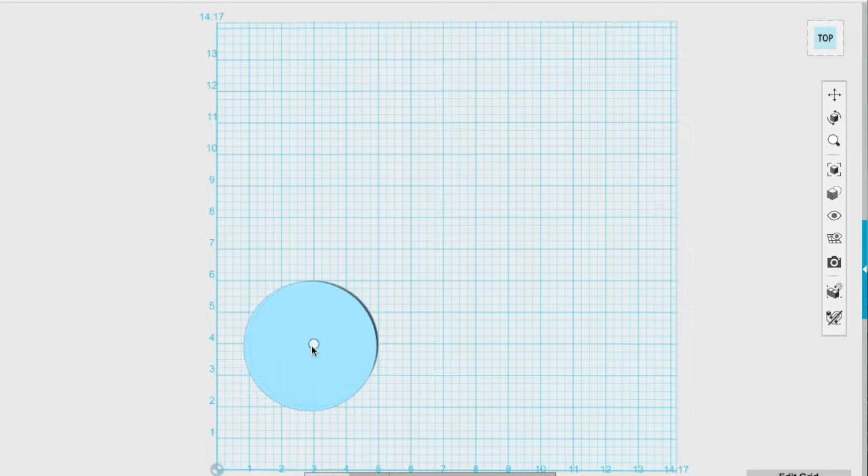This week I am 3D modeling a 2-liter bottle. I chose this project because I thought it would be fairly simple, just combining some primitive objects such as domes and cylinders to create an end product. I also wanted to take the opportunity to learn a few new techniques, such as patterning, as well as external and internal threads. The external threads would be going up the neck of the bottle, and the internal threads would be for the inside of the cap.

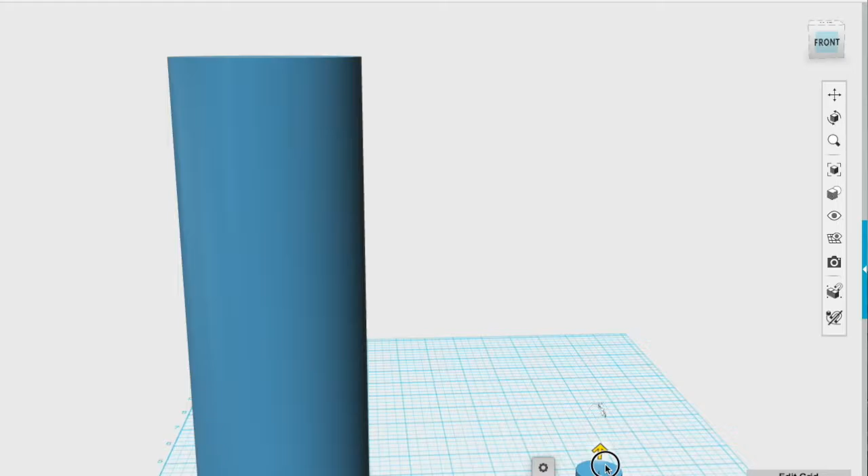This process took a lot longer than I expected, which is why this video is so late coming out. The main reason is because, as with most simple things in life, once you start studying them, especially if you try to replicate them, it turns out to be much more complex than you first realized. The same goes for a 2-liter bottle, especially when replicating it. There's a lot of nuances - lots of flares, concave shapes and convex shapes, as well as it being hollow.

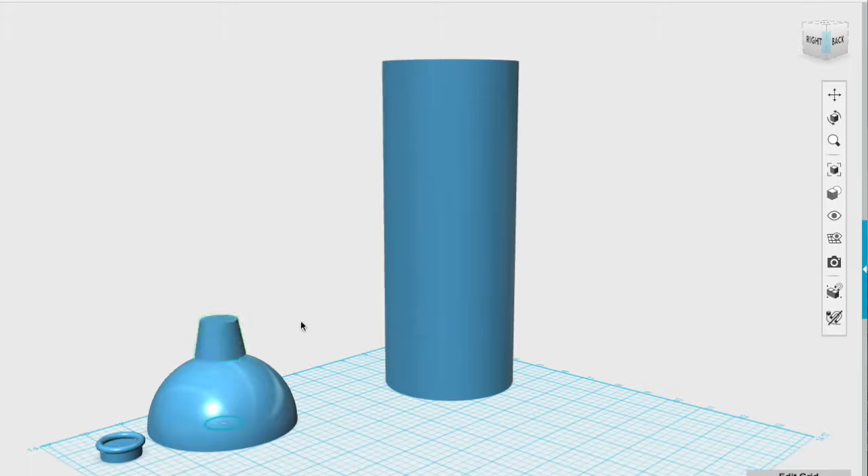Alright, let me catch you up to speed. What I've done is create a flared cylinder - I took a circle, extruded it, and beveled the edges. This represents the flare in the neck of the bottle just under the threaded portion. I snapped the dome to that cylinder to make sure it centers itself. If you snap the cylinder to the dome instead, it will connect wherever - it doesn't snap immediately to the center. So snap the dome to the cylinder and it will align itself properly.

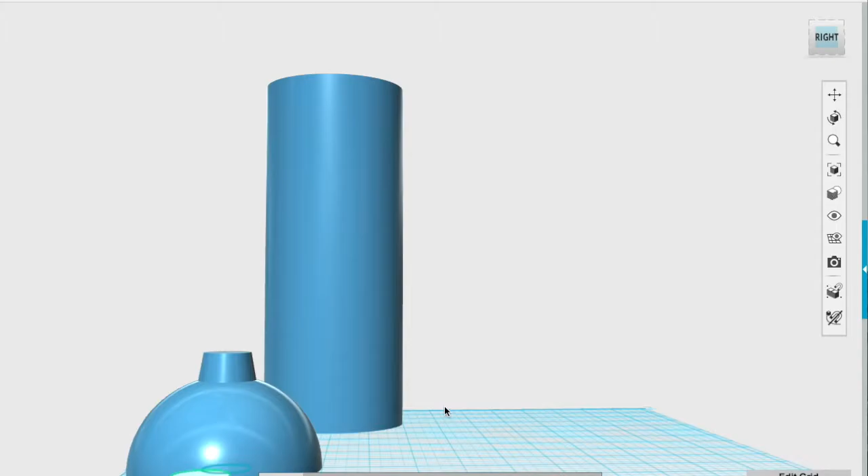I also took a shorter cylinder and stuck a torus, or ring, onto that. That ring represents the lip on a 2-liter bottle that the cap rests against once it's screwed all the way down - it helps prevent leaks. So I made sure my 2-liter bottle had one of those rings on it.

Unfortunately, I did not have a 2-liter bottle on hand to use as reference. I really should have - as an artist, if you're trying to replicate something, you always want reference. Unfortunately, we finished the cream soda I was going to use, and the bottle got thrown out before I could make this video, so I'm doing this by memory.

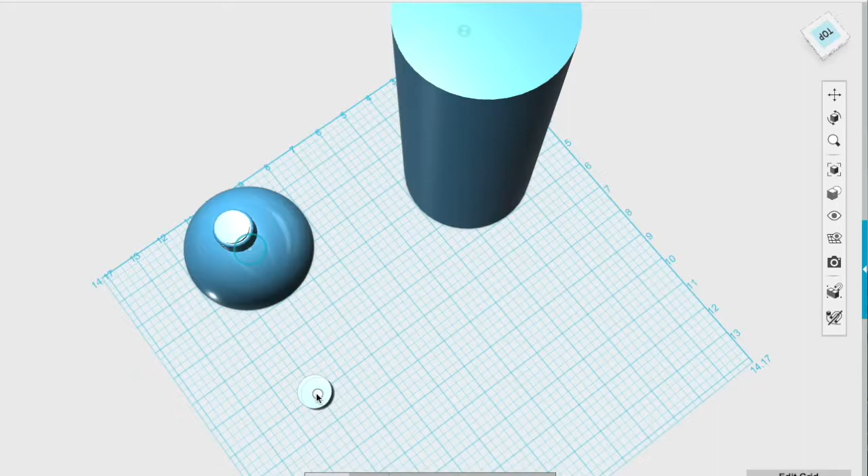Okay, the cylinder I just added is going to be the threaded portion of the bottleneck, and I'm adjusting the sizes and what have you to my liking.

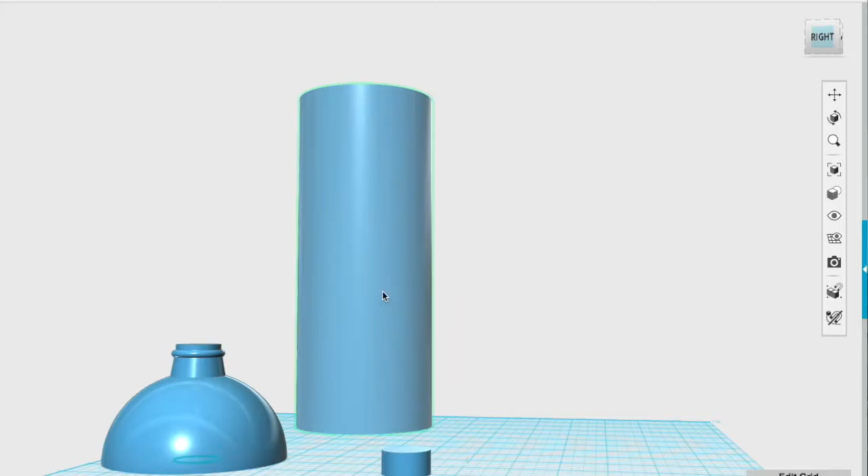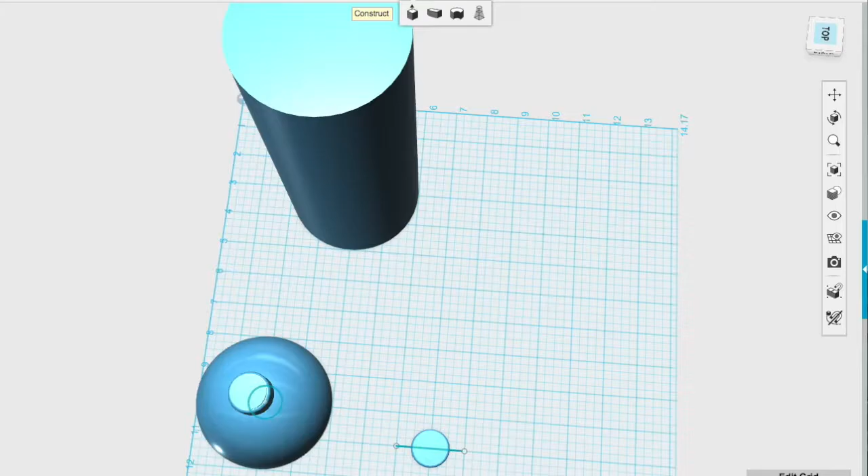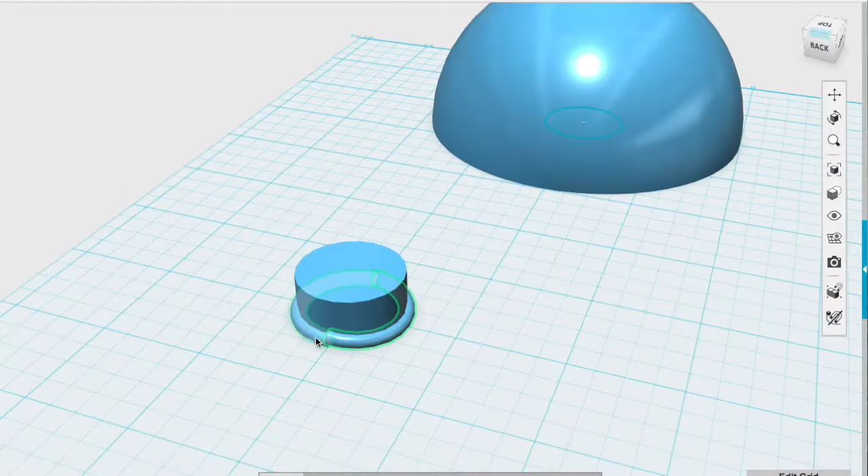Here I am adding a torus. The purpose of this torus will be in the creation of the threads. What you do is split the torus into two equal-sized ring segments - basically cut a ring right in half. Then you tilt each half in different directions. For example, if you tilt the ring on the left -6 degrees, you want to tilt the ring on the right +6 degrees, so it's opposite to each other.

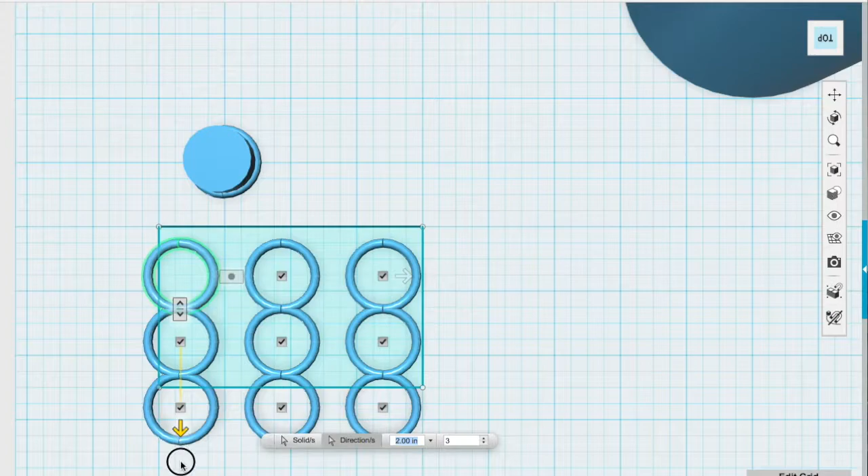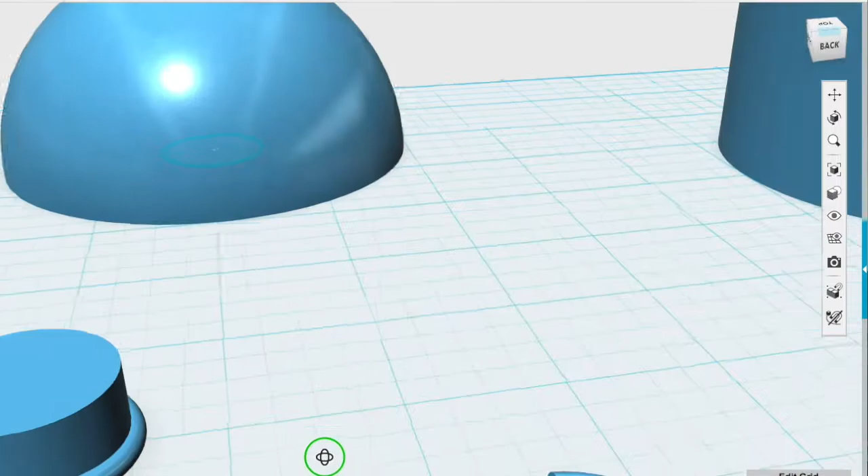Unfortunately, I tilted the wrong axis the first few times, and when I snapped these ring segments back together, they actually joined completely and formed a solid ring instead of the spiraling thread I was trying to create. It took me a while to figure out why it wasn't working. Once again, I was tilting the wrong axis - I was tilting forward and back, not side to side. If you tilt one thing forward 6 degrees and the other back -6 degrees, it's basically on the same angle, and when you snap them together it forms a solid ring, which is not what I wanted. I wanted threads - a nice spiral.

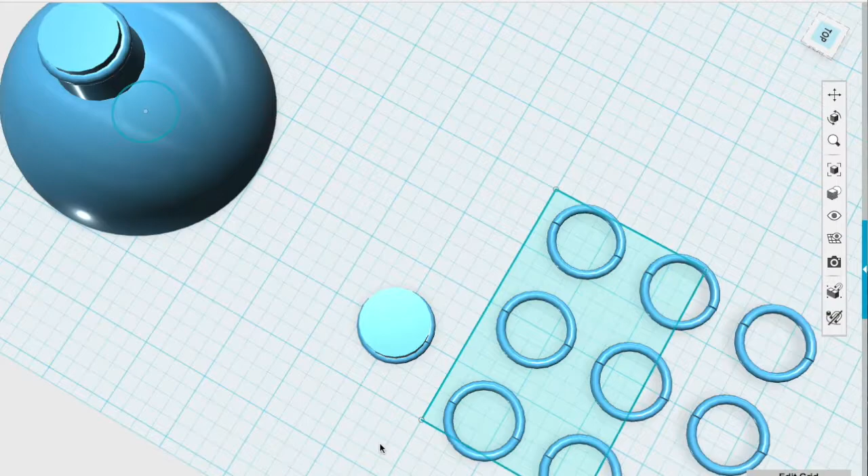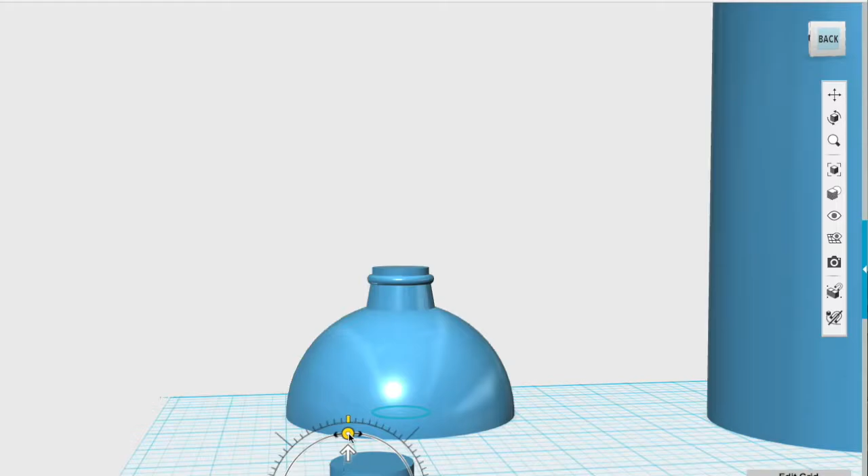In this portion, I'm also learning how to use the patterning tool. To do this, I copied and pasted the ring segments after tilting them, then took a rectangle sketch and put that on the work surface. You need a sketch to work off of when trying to create a pattern, so that you can pick which direction you want your pattern to go in.

So you go up to the pattern tool, select the object you want to replicate, then select the side of your sketch - in this case a rectangle - indicating the direction you want your pattern to move in. Then you just drag your mouse over and it multiplies your object as many times as you like in the direction you move your mouse. That's how you use the pattern tool.

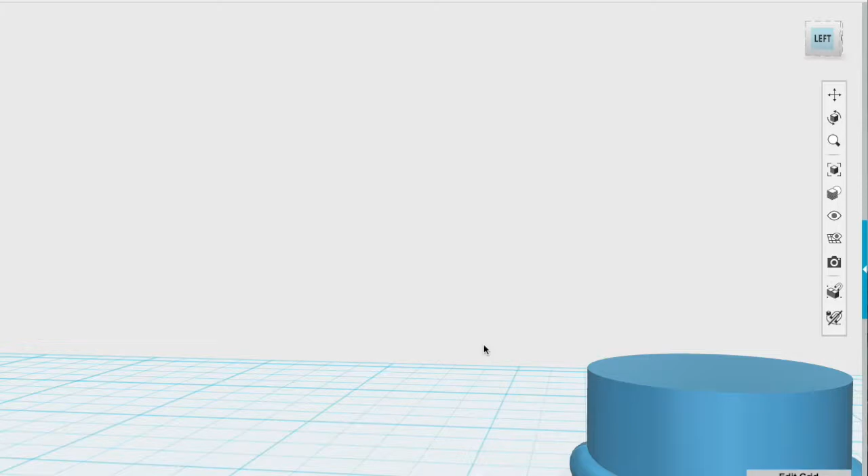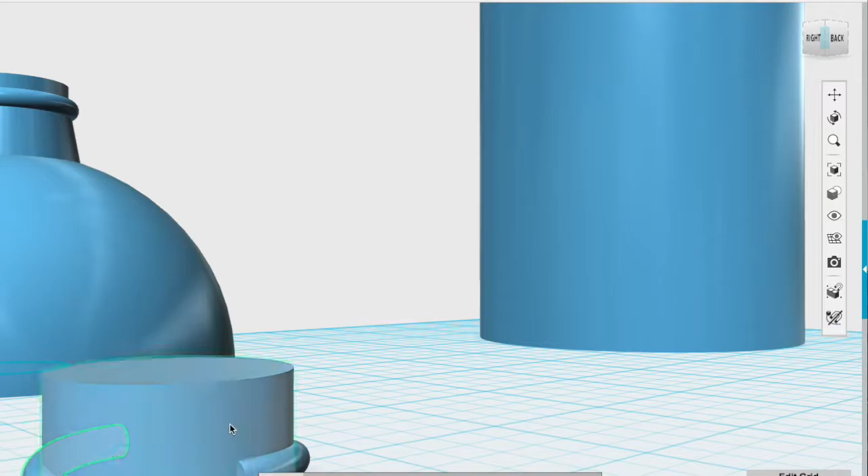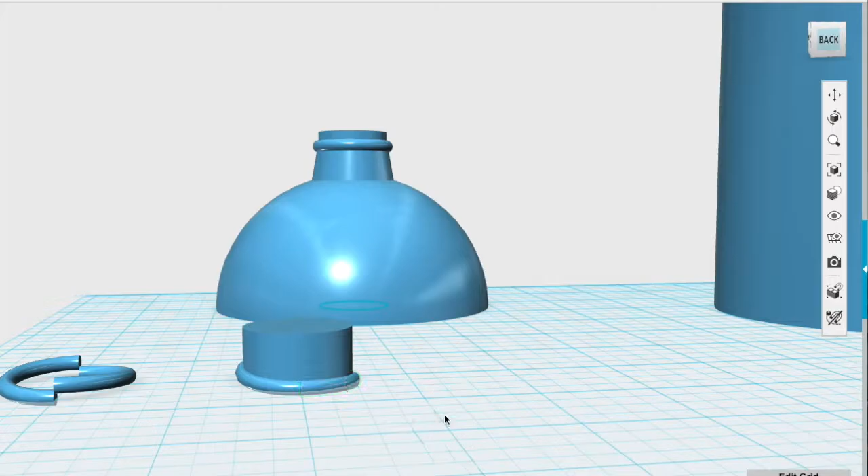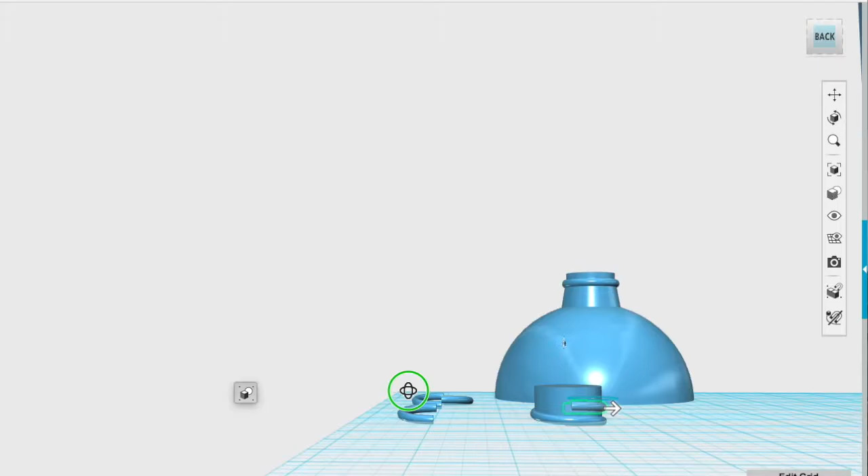Here you see I'm tweaking the axis again on these ring segments. I finally discovered why my rings were not forming spirals. So I'm snapping one face of one ring to a face of another ring, and trying to maneuver. Okay, so I've determined that's the correct way to tilt my ring segments in order to make a spiral, and I also determined I don't really need that many rings, so I only copied those segments twice instead of making 9 of them using the pattern tool.

Whoops, I accidentally pulled that cylinder right out of the middle of those threads, which I didn't want to do. But I do want the cylinder to be a little bit longer because the threads actually extend down past the cylinder, and I don't want that to happen. So I'm making the cylinder taller, and then I'm going to move the cylinder down into the threads.

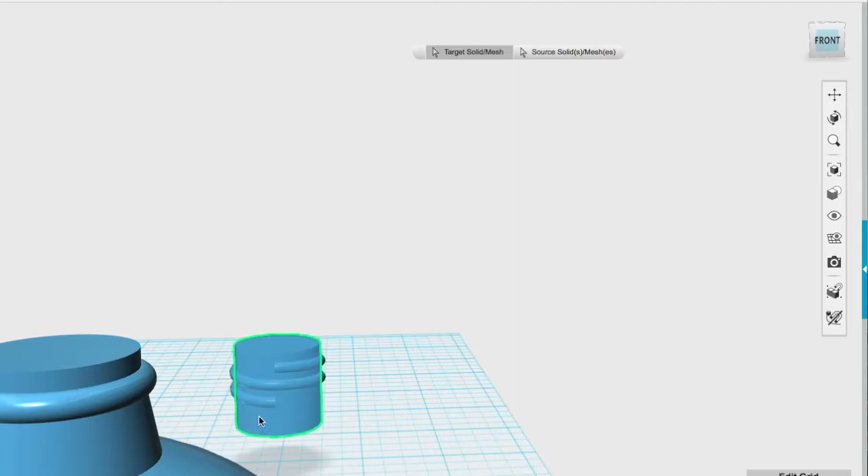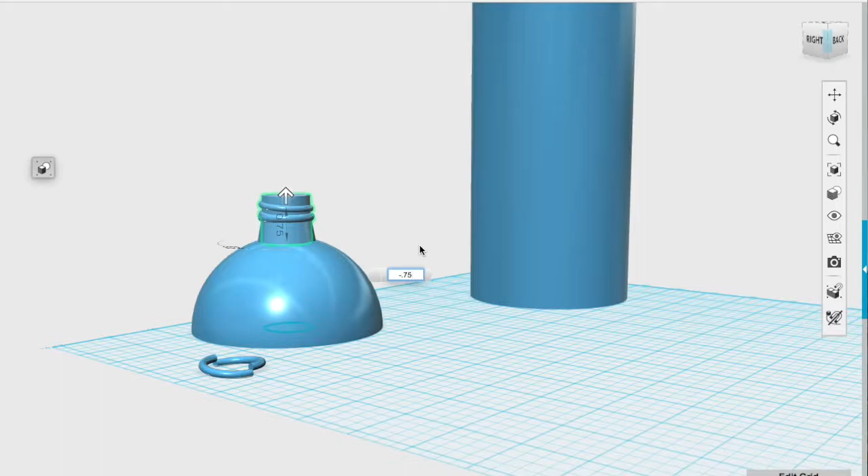Merge these. I've finally got the hang of merge. Yay, it's all one object now. I'm snapping that portion of the neck onto the other portion of the neck that I've already attached to the dome, and adjusting the height of that neck to where it looks more accurate. Like I said, I'm working from memory, so it takes a little bit of playing with the numbers to get it where I like it.

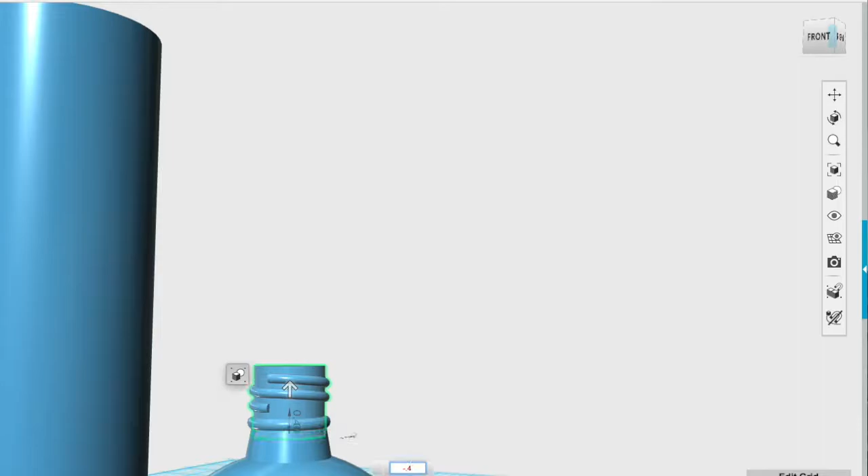Looking at this, I noticed that the lip the cap rests against is way too small to serve any real function. So I'm ungrouping the torus from the flared portion of the neck so I can delete it and put a larger torus in its place to really serve as a shelf. Gonna snap a new torus on the top here, and move the torus down the neck into position.

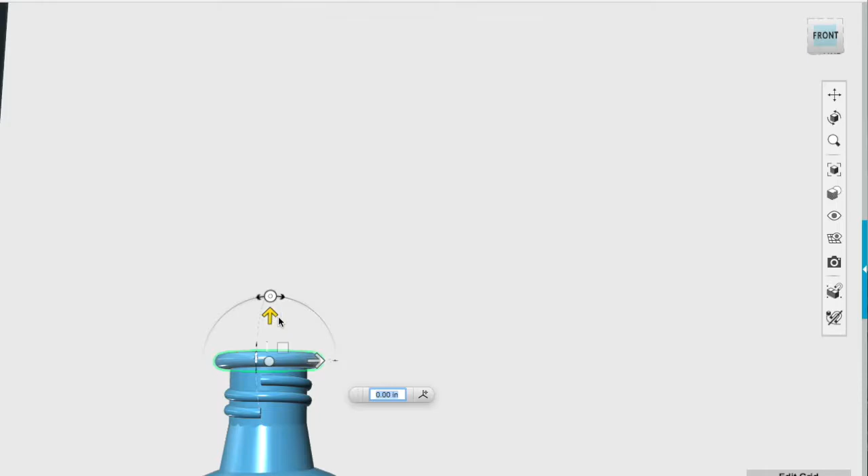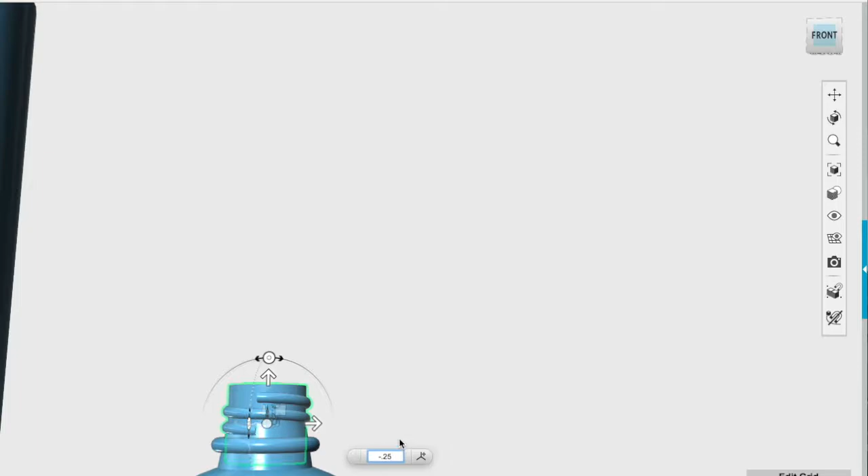Again, here I am trying to adjust the height of the neck. There we are, much better.

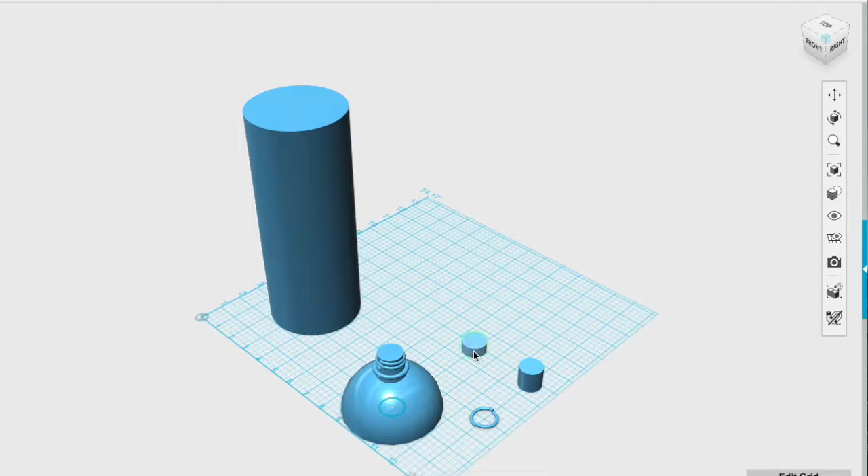Okay, so now it's time to form the cap. I thought I'd recreate the threaded portion of the neck. Well, I've already done that. So I can do it again, fairly easy. Then I realized, hello, I did it already. Why redo it? Why recreate the wheel and go through all that over again? So I copied and pasted what I had already done onto the work surface.

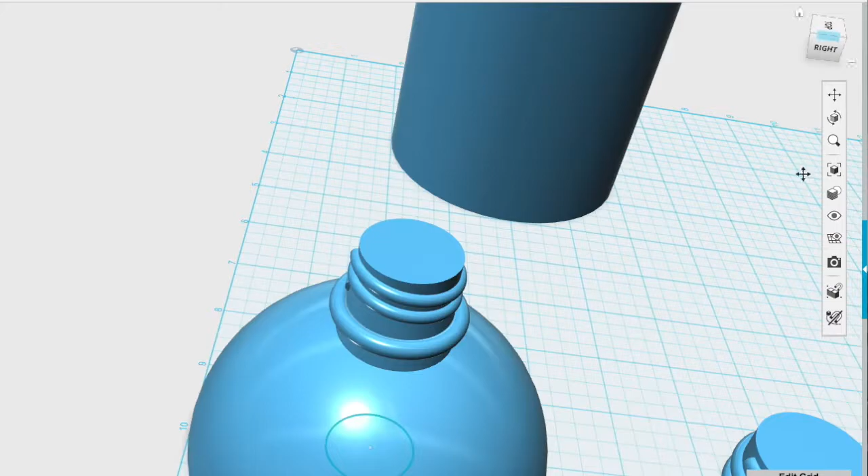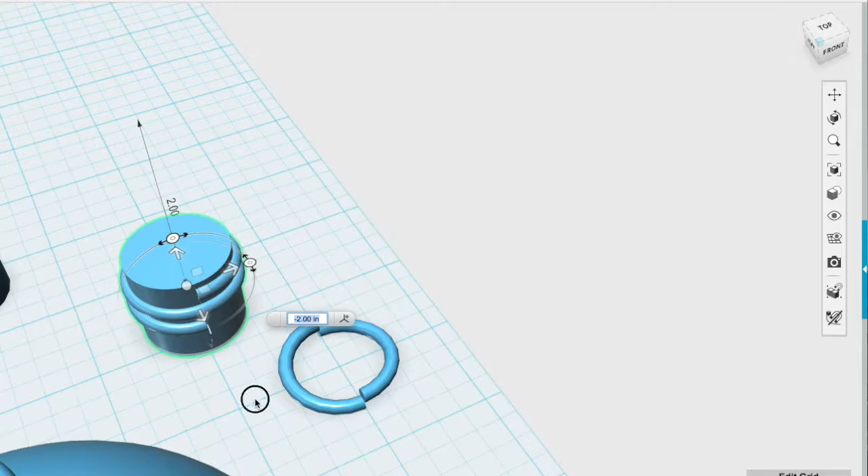Then I decided the threads don't go all the way down that cylinder. I want to make sure it goes further down so that when I subtract it out of the cylinder I'm using as the cap, the threads don't just stop inside of it, they go all the way to the edge. So let's snap another ring section on there, and that'll fix that.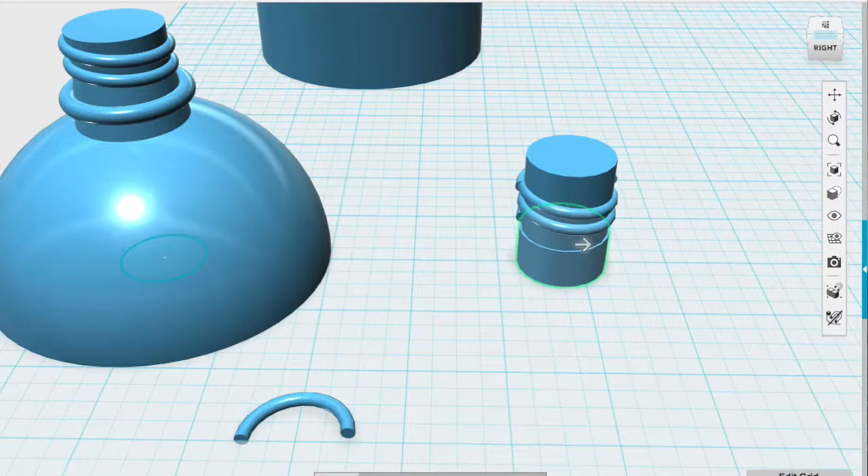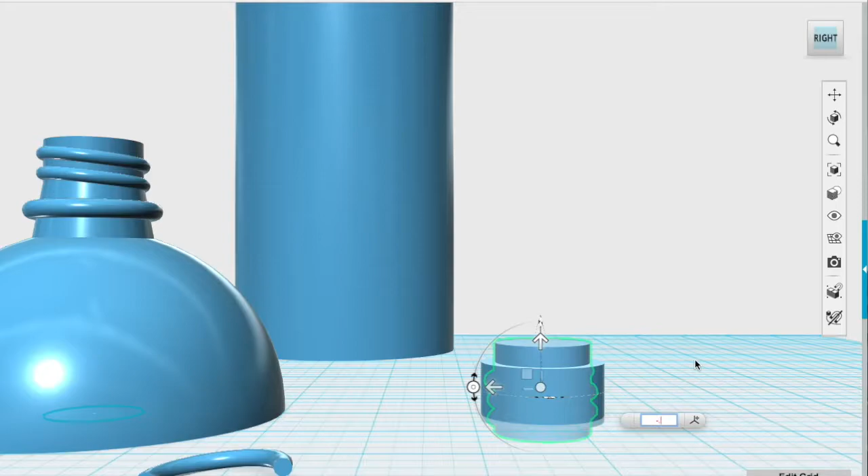Merge these to form one object, snap it to the cylinder I'm using for the cap. Then I realize the cap is too small, so I need to increase the diameter so it will encompass the threads completely. Now I can sink that threaded portion down inside the cap, not all the way through, just into it. There we go.

Now let's adjust the angle and make sure it's centered from above. That looks pretty good. Use the subtract tool. I want to keep the cap and subtract the threads, and there you are, a threaded cap.

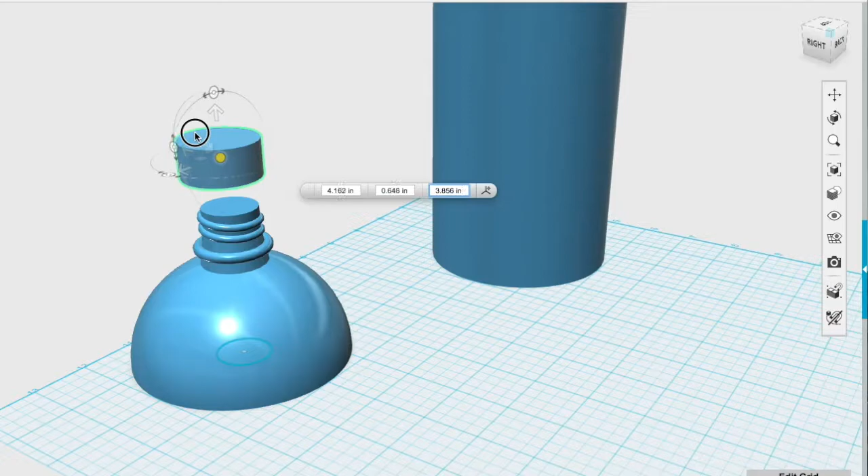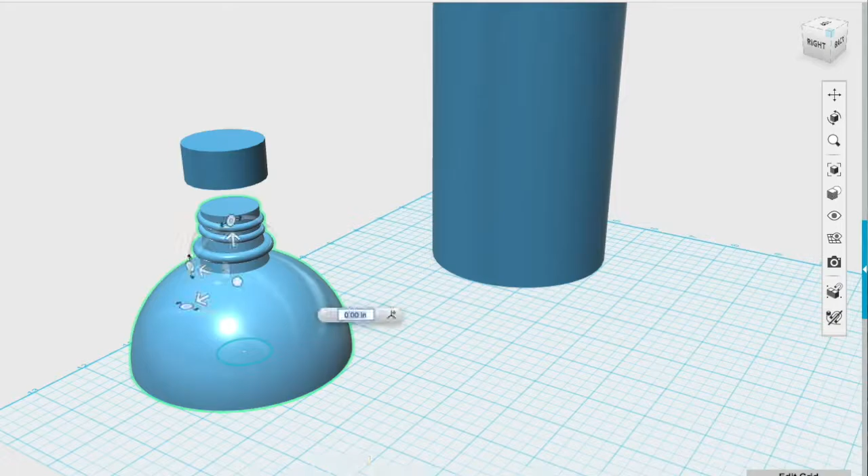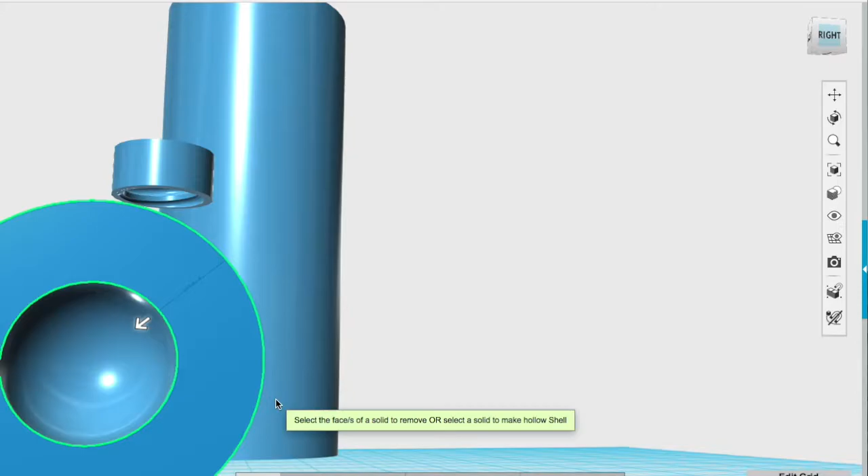Now I'm thinking I'm going to try and hollow out these objects, make it more like a bottle. So I combine the flared cylinder with the threaded cylinder and make that all one piece. Rotate it and use the shell tool to hollow out the shape, but it doesn't work. Great. So I fiddle around with the settings, trying to get it to do what I want, but as you see, invalid operation, invalid operation.

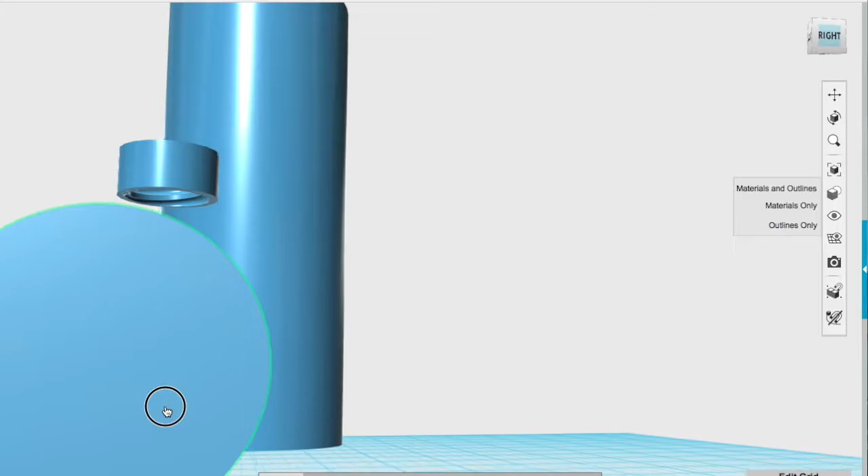More lessons to learn. So there's probably a way to hollow out configurations of merged objects, but I didn't figure it out. So I decided to ungroup all those pieces and try the shell tool again, and that time it worked. Yay!

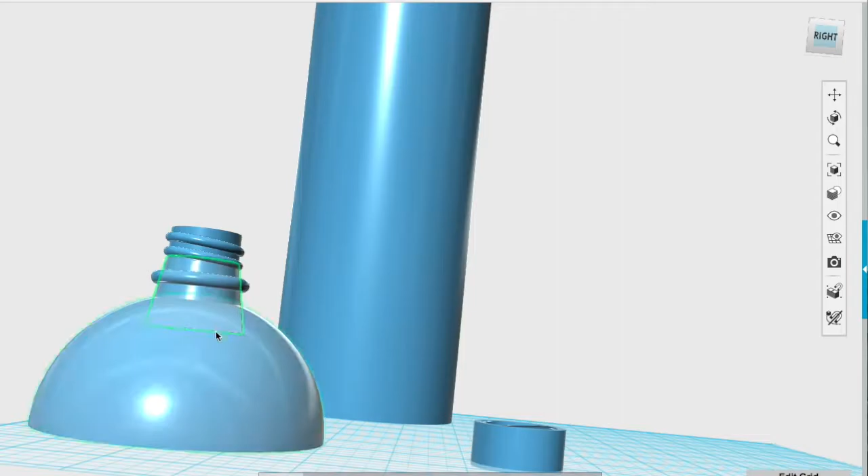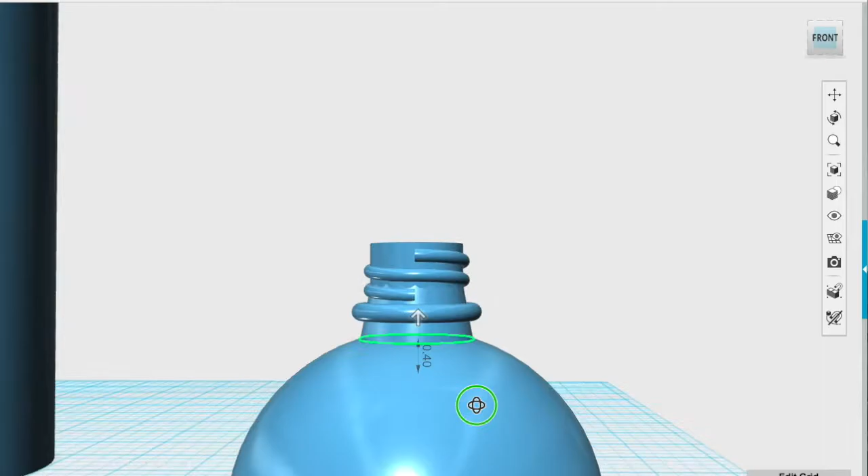So now that everything's ungrouped, this should be easily hollowed out as well, right? Well, let's find out. Then I realized, you know what, if I hollow that out, I'm going to have basically a pipe extending down into the bottle. I don't want that. So I need to move that flared cylinder up so it rests onto the top of the dome instead of going down inside of it. There we are. Now when I hollow that out, you won't see it extending down into the dome portion. But again, there we go. Now we're hollow. Yay.

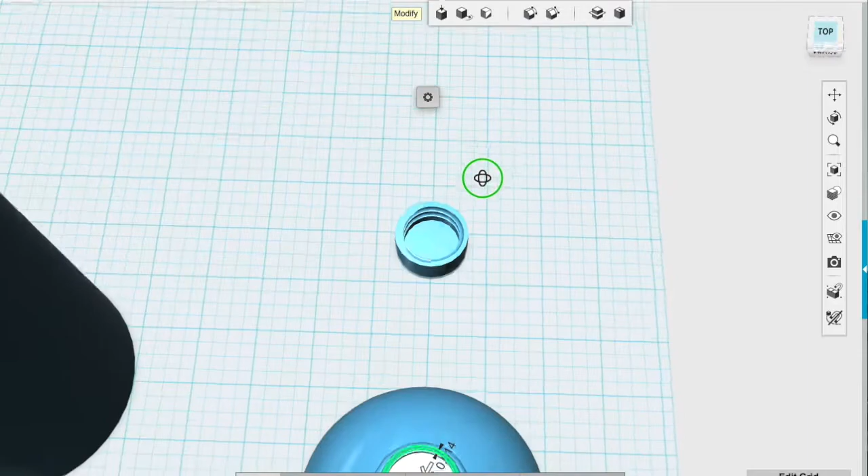Now I'm going to try that. And then I'm confused, because it hollowed out the neck portion, but there was still something plugging up the neck of the bottle. So I keep trying, because that's what I do. Try again.

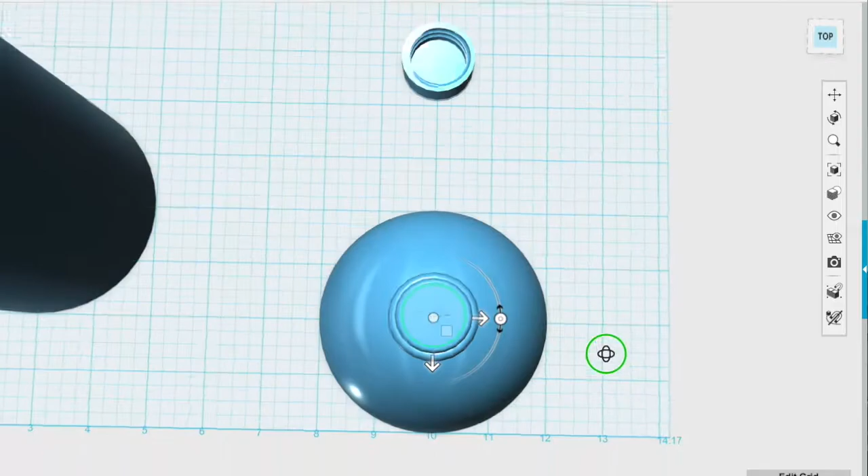Then I decide, you know what, I'll just create a really long cylinder and subtract it from these shapes. So that's what I do. Subtract. Okay, I want to keep the neck, I want to subtract the cylinder. Boom. Oh wait, there's still something plugging it. What is it?

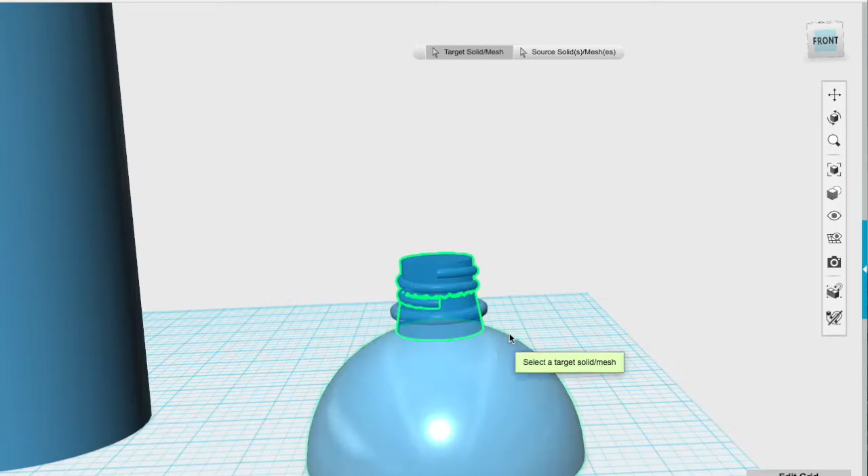See, what happens is when you use the shell tool, it doesn't completely turn your object into a tube, because it doesn't know that's what you want. It creates a bowl. So that flared portion of the neck was still plugged because it was a bowl instead of a tube.

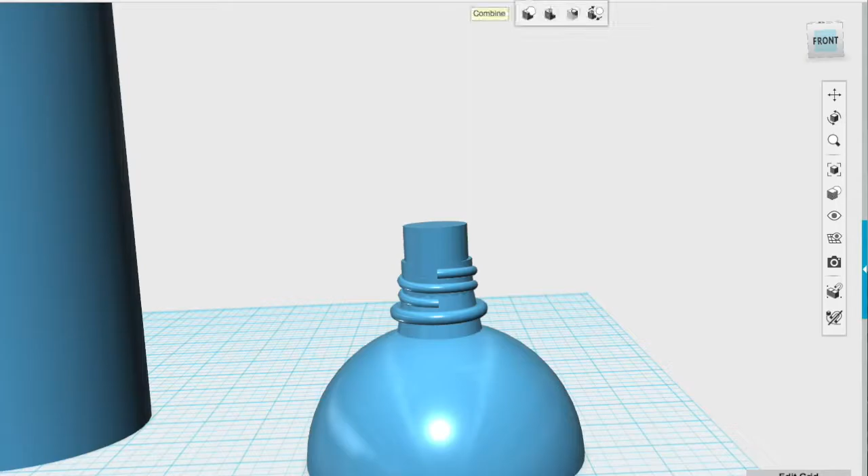Okay, so I tried it again. This time, select the flare, select the threaded portion, subtract. Let's see. What's plugging it now? The dome. Again, I used the shell, so it turned my dome into a bowl, and bowls don't have holes.

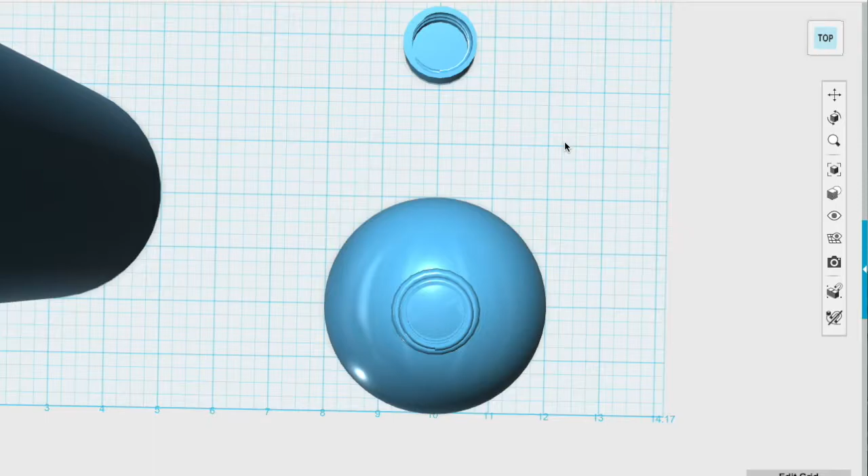Here I am trying to place a cylinder onto a dome, which I remember you cannot center using that method. So I undid everything, merged it all together to make one object, then I used the cylinder to subtract the material through all of the top of the bottle. Now I'm going to hollow out the body of the bottle.

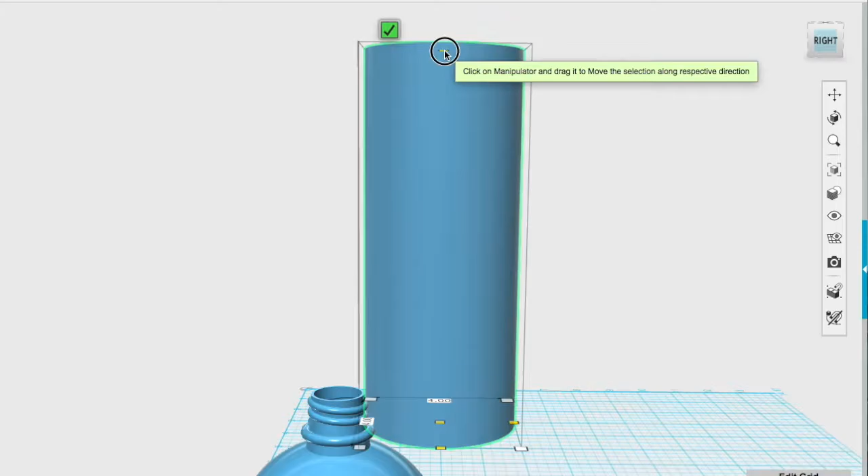Yay, and it works! But I'm not using reference, and I think, wow, that's way too tall to be a 2-liter. So I pull up the Smart Scale tool and shrink it down a bit.

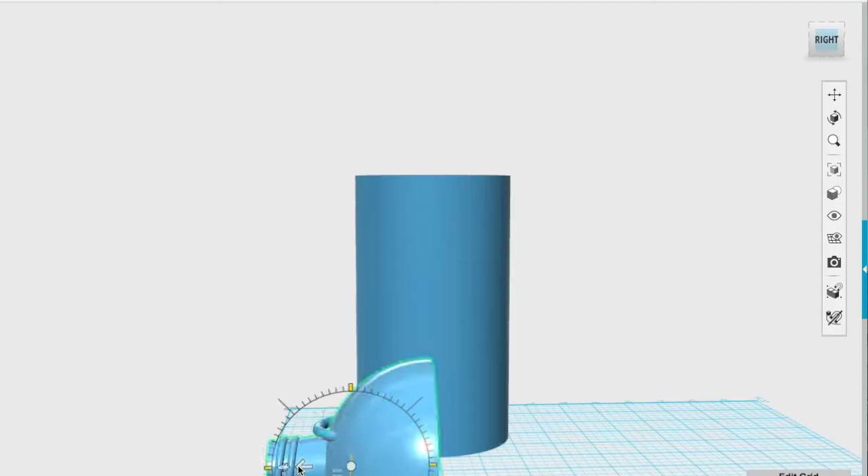I'm going to rotate that top portion so I can access the bottom flange easier. But when I rotate it, guess what happens? That's right, that ring wasn't attached. So let's merge it, make it one object.

Now when I rotate it, all the pieces move. Alright, snap tool, snap that edge to that edge, boom. You have a bottle, or a canister.

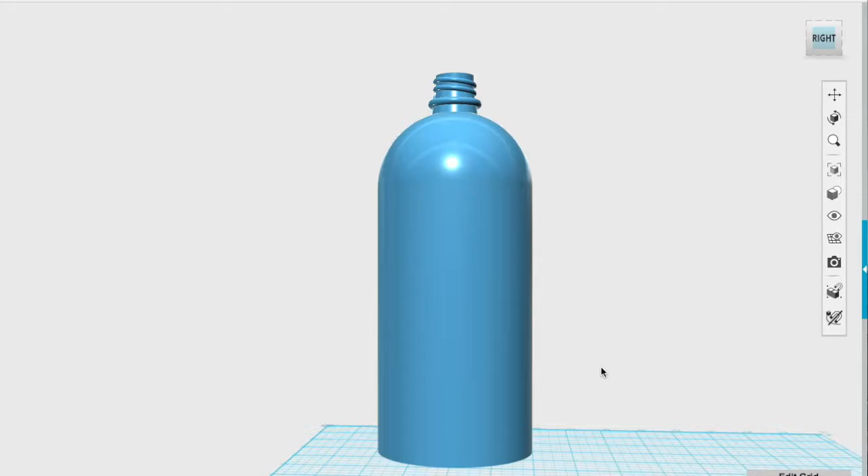Kind of looks like an O2 pack. Scuba diving, that's what it reminds me of.

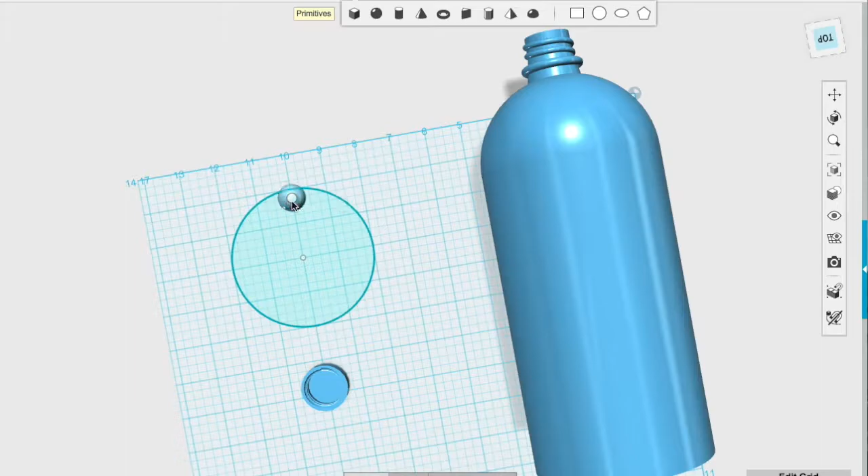Alright, now I rotated this bottle assembly so I could work on the feet of the 2-liter bottle. Again, every 2-liter has domes on the bottom, hemispheres, that act as feet, and there's usually 5 of them in a circular pattern. So what do I do? I start by creating a circular pattern of hemispheres.

Here we go, make 5. And then I say, you know what, I can tell already that those hemispheres are way too small. So let's redo it and make them larger.

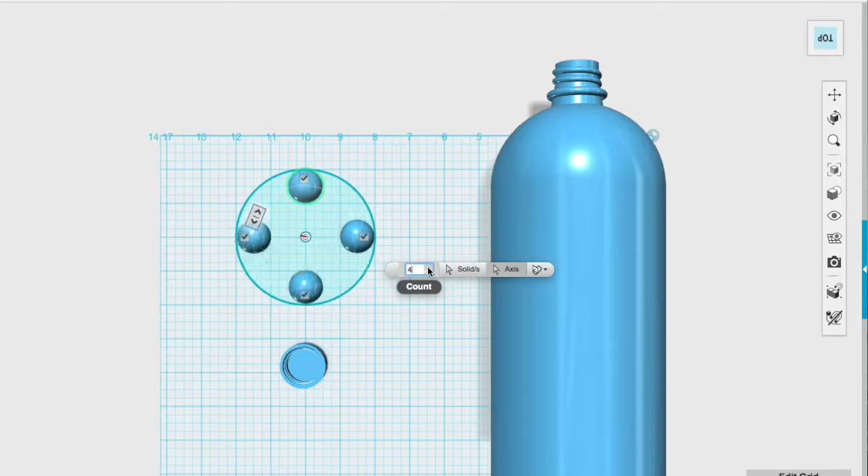There we go, now use the circle pattern tool. Click your axis, increase your object count, and there we go. Group them, rotate them.

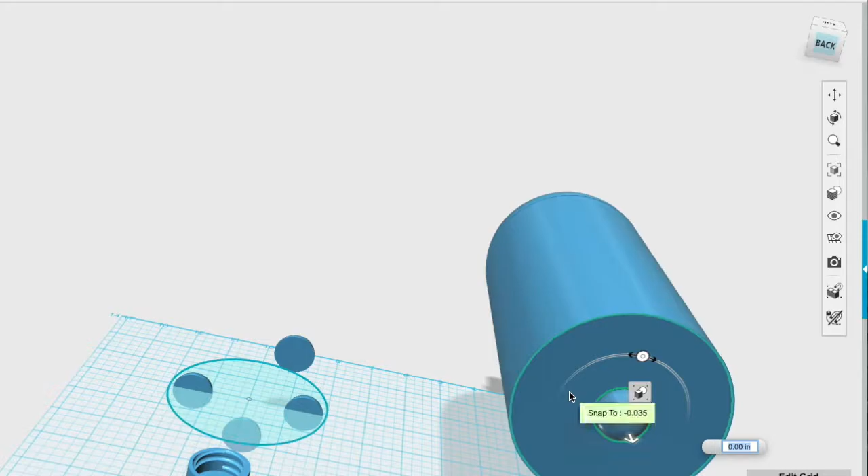And let's try snapping them. Oh, that didn't work, it just moved one hemisphere. I need all 5.

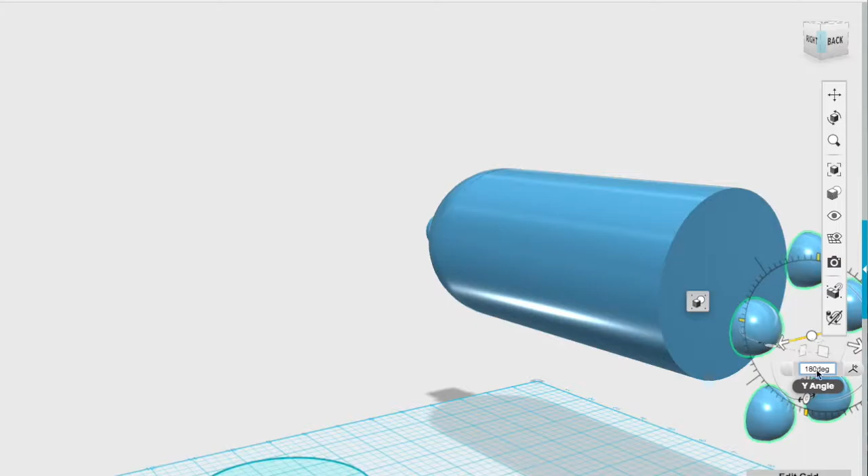So now I'm trying to maneuver this manually. I probably should have sketched the circle onto the bottom of the bottle, then used the circular pattern tool to create the pattern of hemispheres right on the bottom of the bottle itself instead of the grid workspace. But obviously I did not try that, so that will be for a future video.

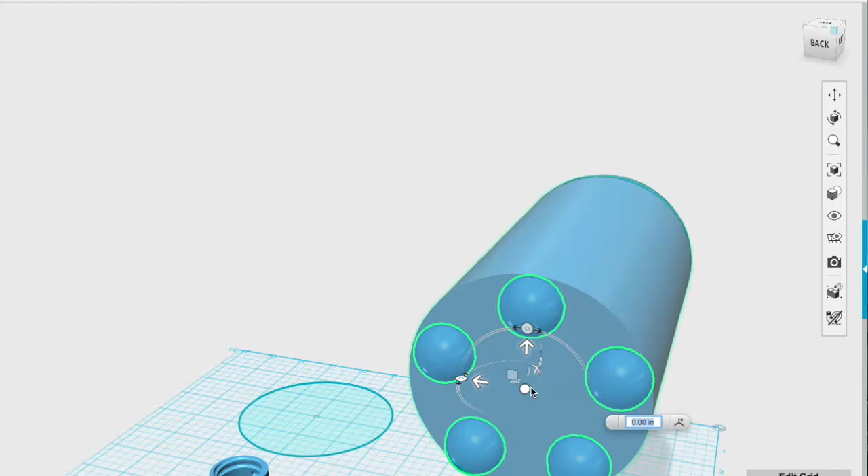Now my thought was, if you look at a 2-liter bottle, it has mountains and valleys. My 2-liter bottle is flat and has bumps. So I thought, why don't I try to take these hemispheres, make duplicates, flip them around, maneuver those hemispheres so that they're in between the other ones. And then I'm thinking I could use the subtract tool, and that would cut those shapes into the bottom of that bottle and create those valleys that you see.

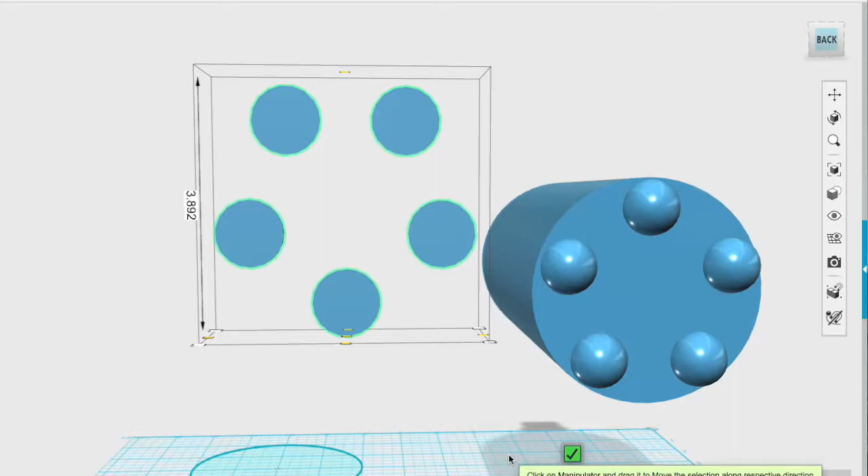But then I looked at the clock, and it was almost midnight, and I had been doing this for hours. And I decided, you know what, forget it, I don't like this idea. I'm going to go with a simplified version of this and call it quits.

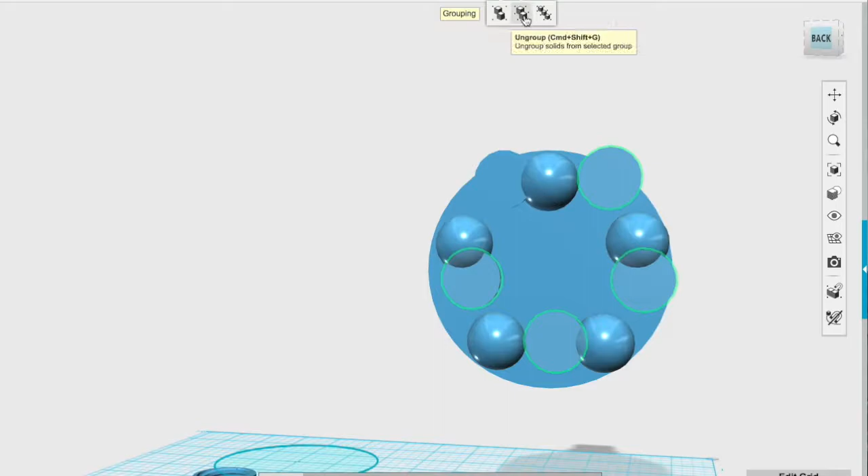So I decided to get rid of those hemispheres, after, of course, I spent way too long trying to move them into position.

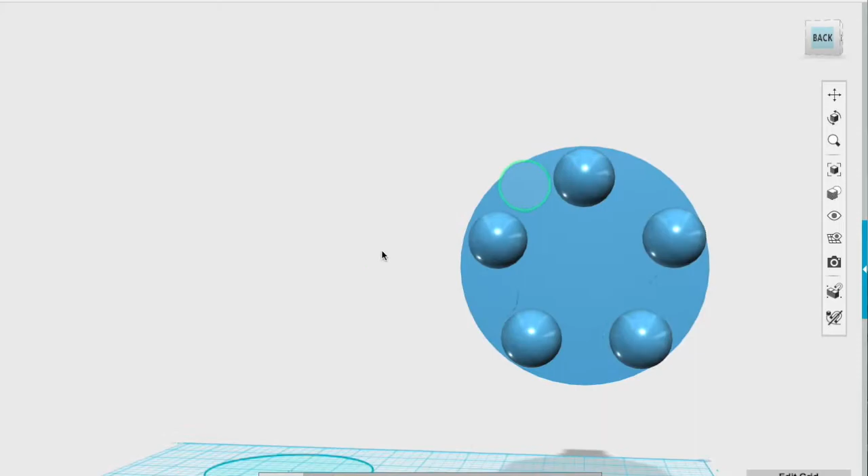Kind of looks like a rocket ship. And I'm rotating this, and this is when I think, I don't think this is going to work. So I do a little experiment. I try to make my own dome by beveling a cylinder that's extruded from a circle sketch.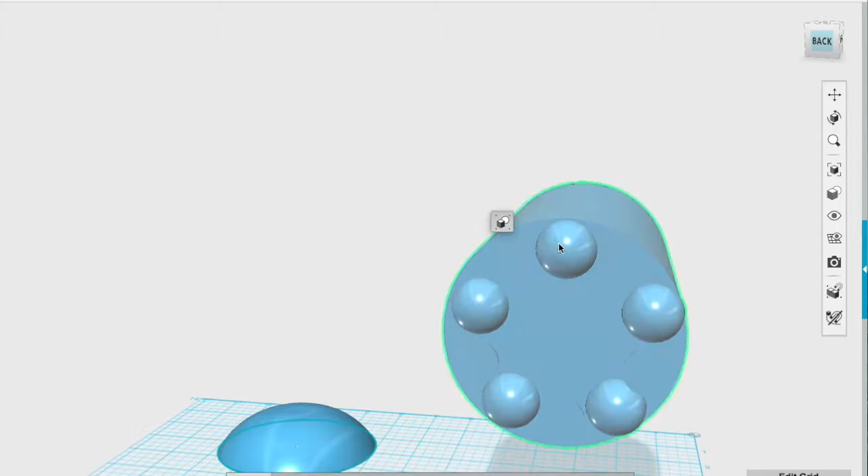See, now I have a dome with beveled sides. Okay, I like that look a lot better.

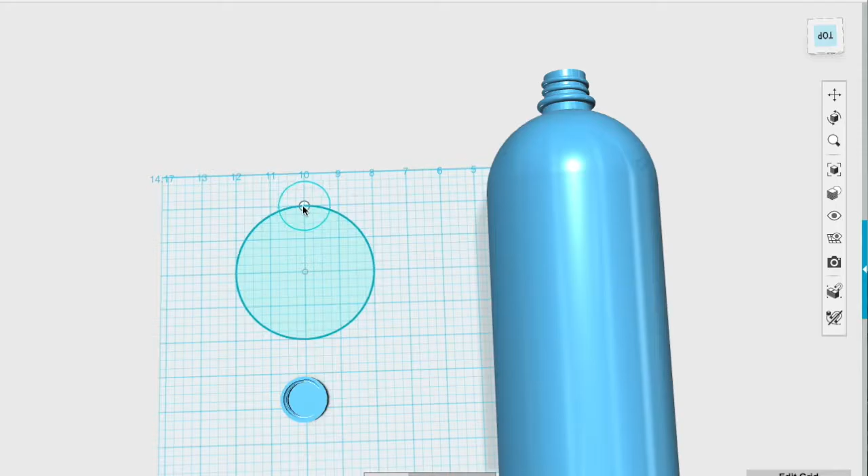And again, I did not learn from my first mistake. I decided to use the grid as my work surface instead of the bottom of the bottle, because that worked so well before. So here's my circle, and I'm having problems.

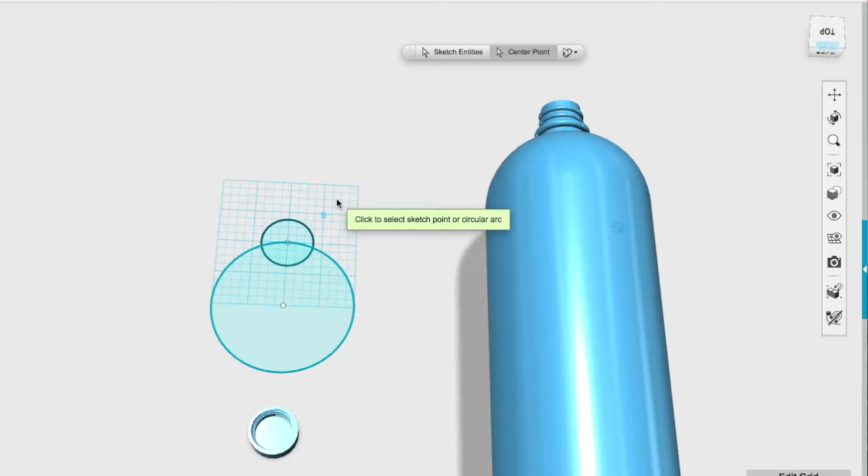Big surprise, seems like that's all I have when I try to do things. Problems. You can see I'm getting frustrated because I keep clicking that axis going, why are you not doing what I want you to do? I'm like, okay, this is wrong.

What did I do? Okay, I insert a sketch, not a primitive. Let's try that. Set my diameter, increase the number of objects, and there we go. Now I can extrude each of these circles into cylinders, which is what I proceed to do.

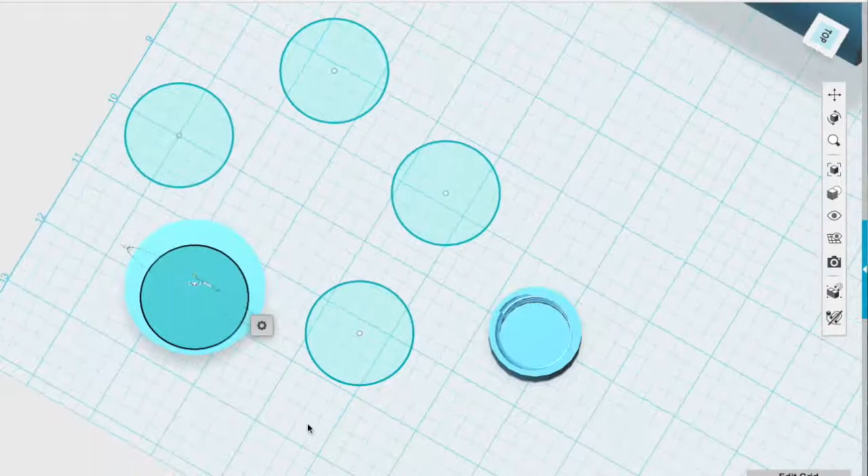One at a time, and you get to watch it. Okay, so here I am trying to determine how much I want it to flare out. Okay, so now I extrude them all, flare them out to the same degree, which I believe I used 20. Yep, 20 degrees.

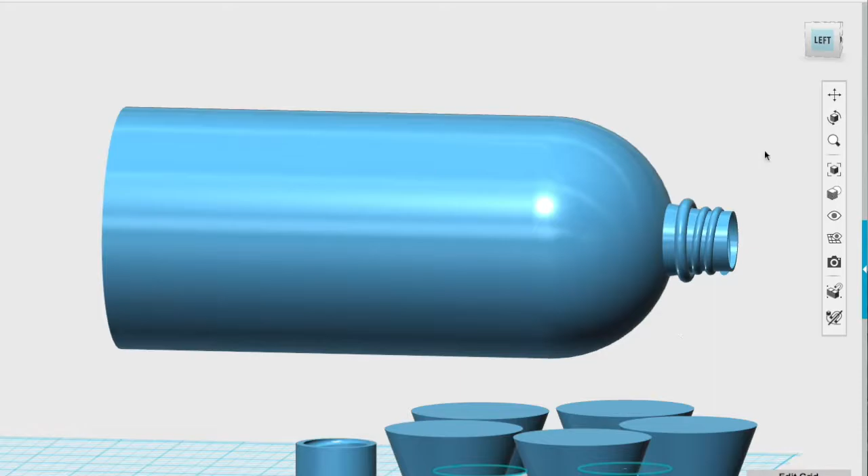Do that on the rest of them. There we go. And then I will rotate these 180 degrees so that I can work on the portion that I will be doming.

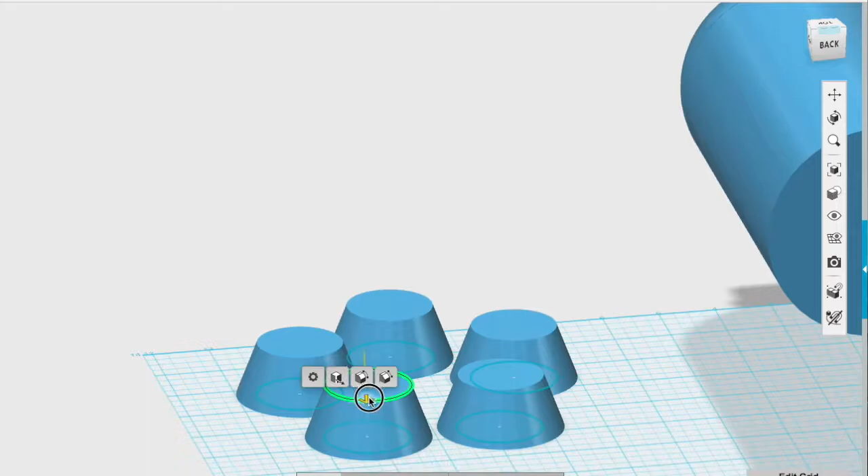Let's round this off. Boom, it's a dome. And do it 4 more times. There we go, hemisphere.

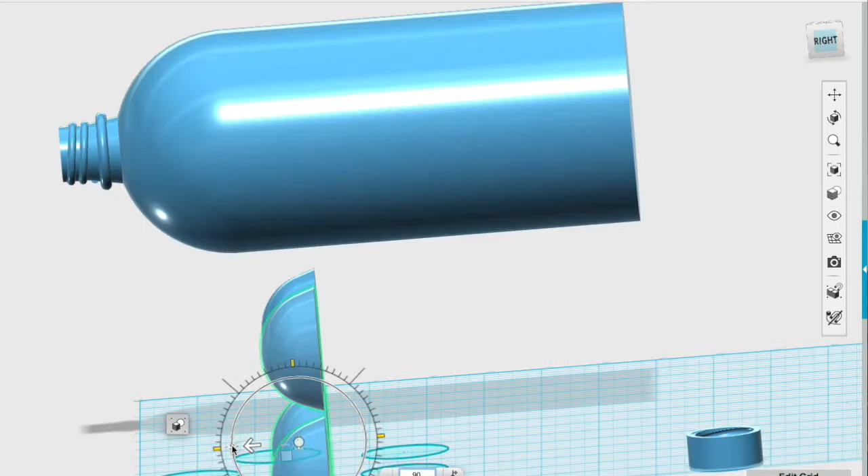Rotate it, flip it again, and move it into position. Manually, of course.

Adjust the sizing. Bring these out of the bottle. They need to go onto the bottom of the bottle, not into it. And there we go, it's not bad.

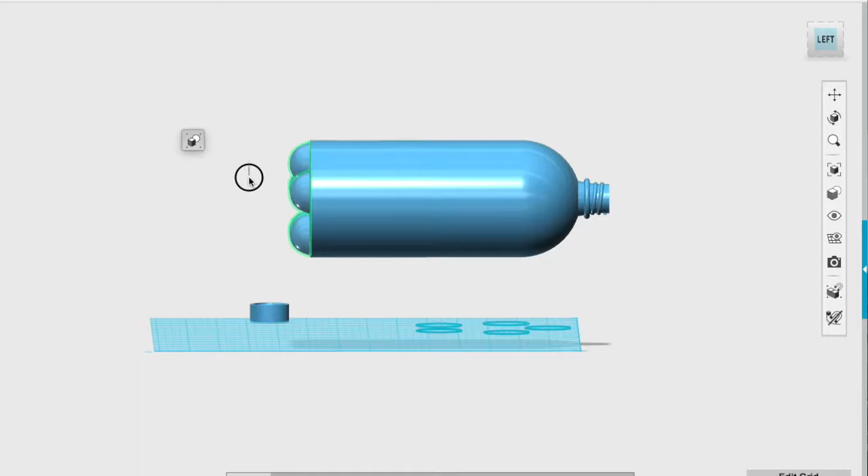I mean, if you opened up a program and you saw this, you would say, hey, that's pretty cool. It's a bottle with a cap. And I learned a lot in the process, so I say it's a success.